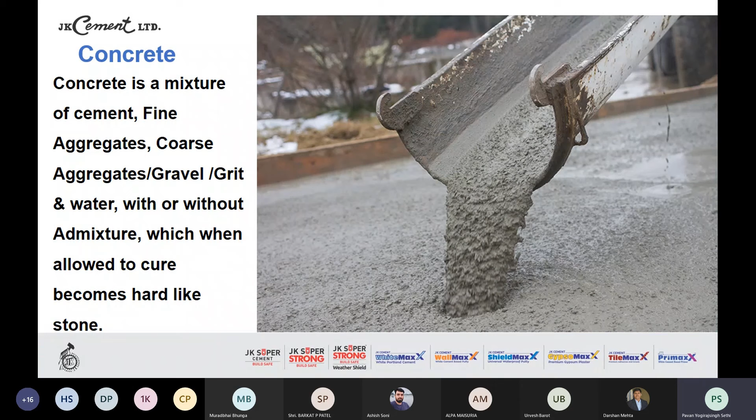A simple definition of concrete: Concrete is a mixture of cement, fine aggregates, coarse aggregates or gravel or grit, and water, with or without admixtures, which when allowed to cure becomes hard like stone. So this is the standard classic definition of any concrete.

Now the advantages of concrete, why it is being used worldwide in such a big quantum. It can be molded in any shape. It is durable. On-site fabrication is possible, like the precast. It is economical when compared to many other products. It is fire resistant up to a great extent. It is energy efficient also, because concrete does not emit as much carbon footprint as other products available, which are also costlier. And also aesthetically, since it is moldable and durable, it gives a very good aesthetic look if molded properly.

Now Surat is a city of flyovers. I have heard there are more than about 100 odd flyovers in Surat, and you might have seen many flyovers with some carvings on it. So it gives a good aesthetic look, because it can be converted into any shape or size.

Now there are a few disadvantages also of concrete. It has a very low tensile strength, and to fulfill this lacuna, we add steel to it. You might have seen whenever there is a slab, column or beam, we add reinforcement to it. This is to increase the tensile strength of the overall concrete member.

It is brittle, just like glass. It can bend a little, and up to a certain extent it will bear that, but after a little more bend, just like glass, it will crack immediately.

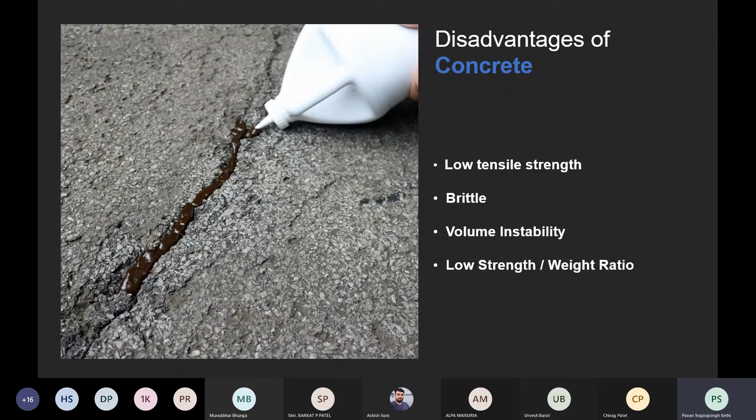It has also a very low strength to weight ratio. Just compare a member of concrete which can take some X amount of load, and then compare it with a steel member. The steel member will have a much lesser cross section area to bear the same load as the concrete. If concrete has to bear 1 ton of weight, we need a structure of 1 meter by 1 meter, but to bear the same weight, we need a very small structure of steel. It will not be a very big structure. So hence we say it has a very low strength to weight ratio in comparison to many other products. So these are the disadvantages of concrete.

Mainly there are two types of concrete in use. First is the normal concrete, like I said before, the 1-2-4 and 1-1.5-3, which is a nominal form of concrete. Nowadays we go with mix design concrete. The second form is the special concrete, high performance concrete with high strength, high flowability, and many other properties which can be seen in see-through concrete and others. We'll go through this in the presentation. So these come under the category of special concrete.

Now let's begin with the basic idea about normal concrete. Concrete that is obtained by mixing the basic ingredients like cement, fine aggregates, coarse aggregates and water will give us normal strength concrete, as you can see in the picture. The strength of this type of concrete will vary from 10 to 40 megapascal.

The normal strength concrete has an initial setting time of 30 to 90 minutes that is dependent on the cement properties and the weather conditions of the construction site.

Now, normal concrete is again divided into two parts: the plain concrete or PCC. Plain concrete will have no reinforcement in it. The main constituents are cement, aggregate and water. The density ranges between 2200 to 2500 kg per m3 and the compressive strength ranges between 10 to 50 megapascal.

These types of concrete are mainly used as lean or base concrete, or in the construction of pavements and buildings, especially in areas where there is less demand for high tensile strength, as you can see in the picture.

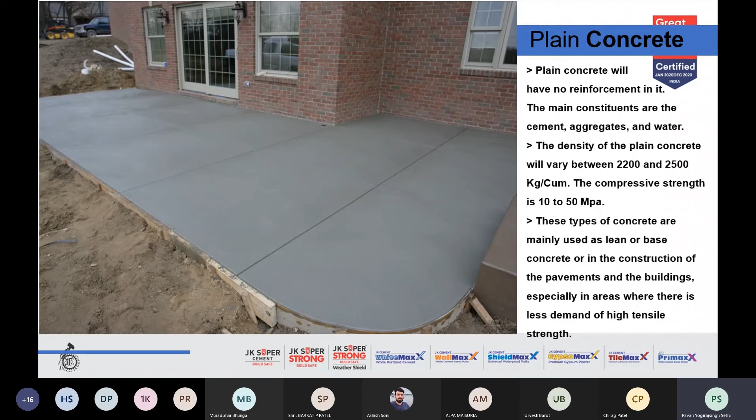Now, the second part of normal concrete is the RCC or reinforced concrete. Reinforced cement concrete is defined as concrete in which reinforcement is introduced to bear the tensile strength. Plain concrete is weak in tension and good in compression.

Hence, the placement of reinforcement will take up the responsibility of bearing the tensile stresses. The steel reinforcement used in concrete can be in the form of rods, bars, fibers, tendons or meshes.

Whatever type of reinforcement is used in concrete, it is very necessary to ensure a proper bond between the concrete and the reinforcement. This bond will control the strength and durability of the concrete. As you can see in the picture, it is a highly reinforced structure, and if the bond is not good, the overall concrete strength will be reduced drastically.

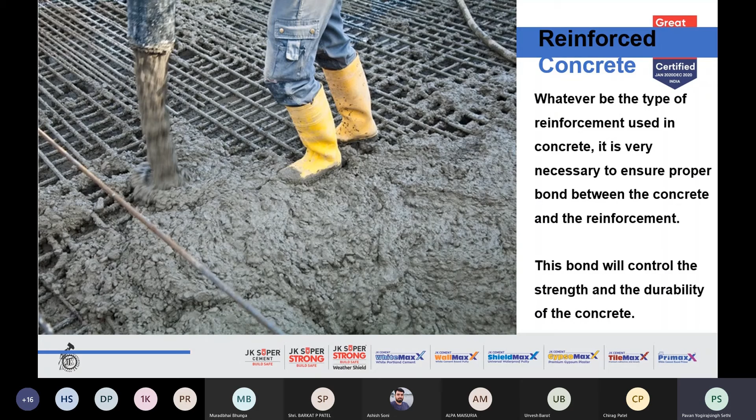Now the special concrete. We have divided special concrete into categories. First is for all major construction works. Second is the new advancement, and third, I have also taken a topic with 2 to 3 types of concrete dealing with very new advancements in civil engineering with the help of information technology.

So special concrete part one is for all major construction work. These include ready mix concrete, precast concrete, pre-stressed concrete, high density and lightweight concrete, air entrained concrete, fiber reinforced concrete, shotcrete concrete, ferrocement concrete, self-compacting concrete, mass concrete, and HPC or high performance concrete. We'll start one by one.

It is popularly called RMC, specially manufactured for delivery to the customer's construction site in a freshly mixed, plastic or unhardened state. As you can see, the concrete is still in the unhardened or plastic state. It is sold by volume, expressed in cubic meters. Any concrete sold in the RMC business is sold in cubic meters.

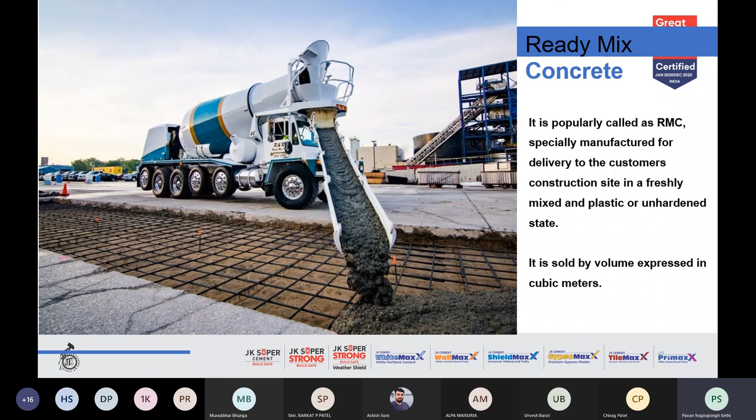Now, what are the advantages and peculiar points of ready mix concrete? The elimination of storage space for basic material at site. There is no requirement of any storage space at site. As you can see, the execution is done immediately as soon as the pouring is started.

Elimination of hiring plant and machinery at site. Wastage of basic material is avoided. Labor associated with production of concrete is eliminated. You can very well see this in the picture.

Time required is greatly reduced. Noise and dust pollution at site is reduced. I come from Bombay, and in places like Bombay, there are great issues with regard to corporation norms, where noise and dust pollution is not allowed by the corporation. I expect that Surat might have similar bylaws, so in that case too, ready mix concrete comes very handy.

Now, advantages of ready mix concrete. A centralized concrete batching plant can serve a wide area. In cities like Bombay, Ahmedabad, or Surat, one RMC plant centrally situated can cater up to 25-30 kilometer long areas.

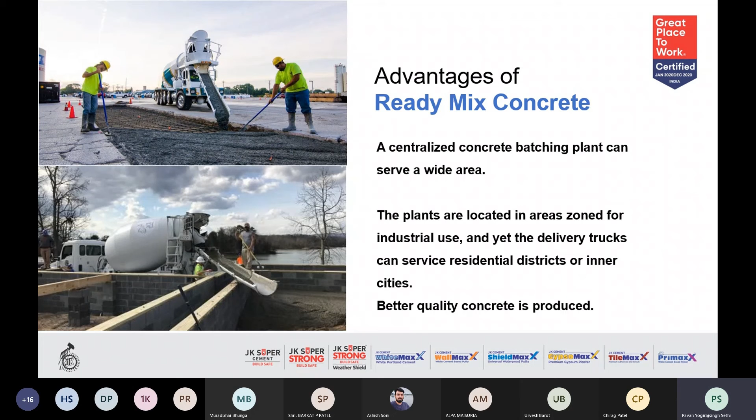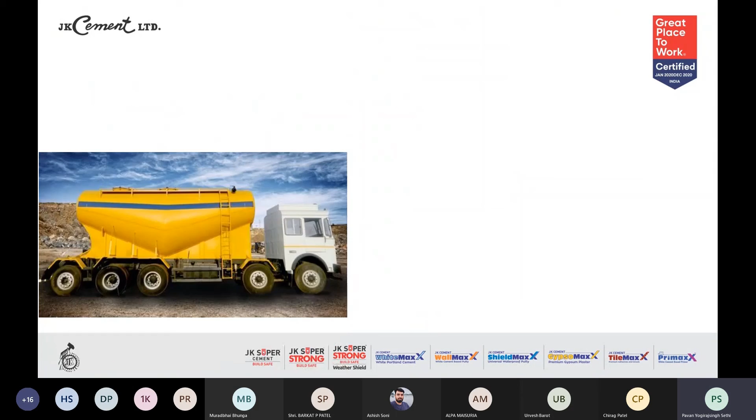These are the bulkers. The top picture in the yellow truck shows the bulkers. These are used nowadays in many big cities like Bombay, Ahmedabad, Surat. You find bags are being eliminated and bulkers are mostly in use. These bulkers have inbuilt compressors which pump the cement to the silos, so there are no bags involved. The cement is supplied in loose form.

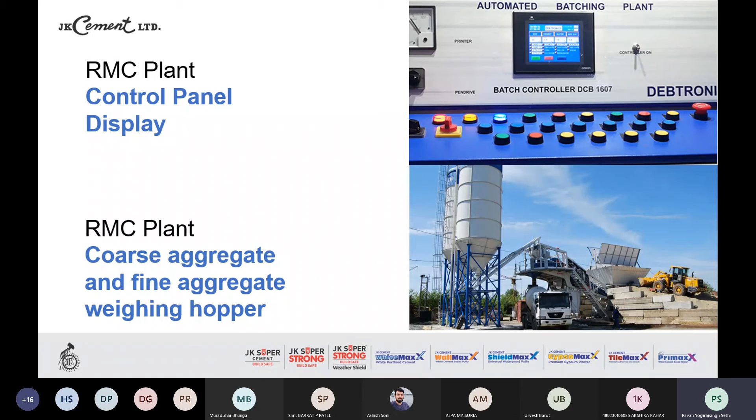Now, a closer look at the hoppers. RMC coarse aggregate weighing hopper, and conveyor belt. RMC plant transit mixer. And now this is a very important picture below. It is the transit mixer.

It is just like a truck basically with a cylinder, which consistently keeps on moving or rotating on its axis, so that the concrete inside the cylinder does not get set. Also due to the continuous agitation, it remains in flowable condition until reaching the site.

So the quality person at the RMC plant has to decide what is the distance from his plant to the site, and what is the requirement of pumpability or the slump cone, say workability, at site. For example, if a plant is located at location A and the site, location B, is at 30 kilometers, the quality person has to decide how much admixture dosage he needs to add so that he can get pumpable concrete at the site itself. This is a very key factor in the ready mix concrete business.

There is the cement weighing hopper through which it is transported to the mixer machine.

Now, in precast concrete, various structural and non-structural elements can be made and cast in the factory as per the specifications and brought to the site at the time of assembly. Such concrete units are called precast concrete units. Examples of precast concrete units are concrete blocks, precast walls and poles, concrete lintels, and many other such elements. These units have the advantage of achieving speedy construction, as only assemblage is necessary at the site.

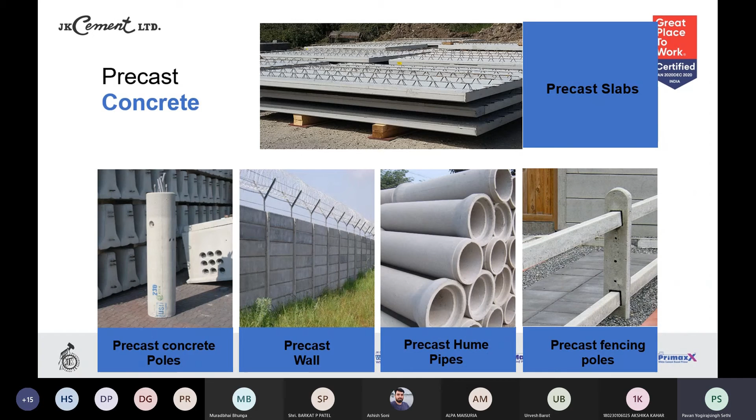Many other forms of precast units being used in India and across the world are precast slabs, precast concrete poles, precast walls, precast hume pipes, precast fencing poles, and so on. But these are the mainly used precast members in India as of now.

Now, prestressed concrete is again a form of precast concrete only, but prestressing is done in the form of tendons so as to increase or better the properties of the concrete. Most of the mega concrete projects are carried out through prestressed concrete units. This is a special technique in which the bars or tendons used in the concrete are stressed before the actual service load application.

As you can see, the tendons at the beginning of the concrete member are inserted and then released. This phenomenon of prestressing helps in lowering the section of the concrete member and makes it stronger against tension.

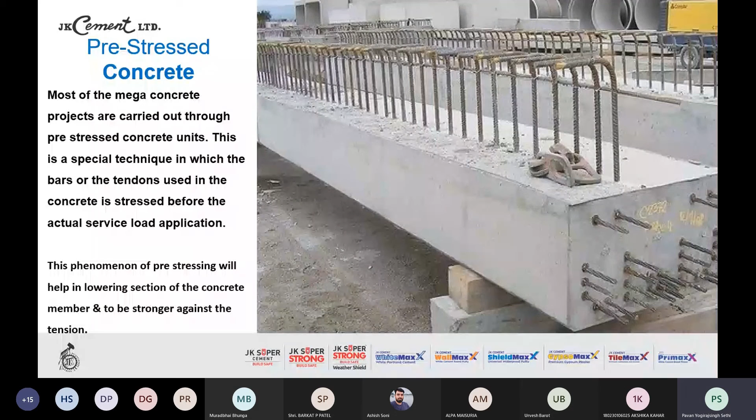Now the high density concrete. Concrete with densities ranging between 3000 to 4000 kg per meter cube can be called heavyweight concrete, resulting in high density. Normally concrete has a density ranging between 2300, or slightly above that, to 2500 or 2600.

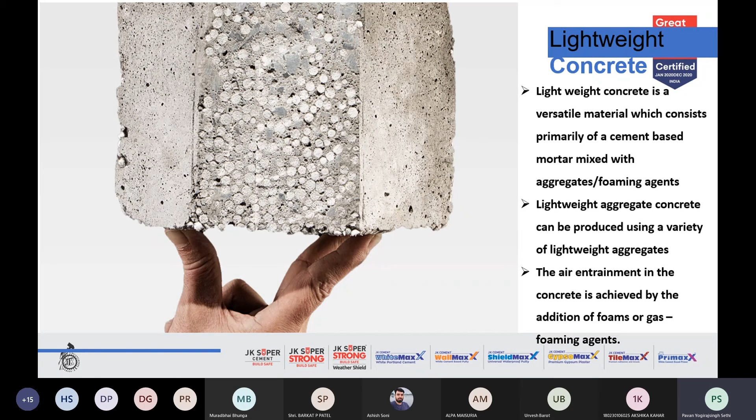Lightweight concrete is a versatile material consisting primarily of cement-based mortar mixed with aggregates or foaming agents. Lightweight aggregate concrete can be produced using a variety of lightweight aggregates, like perlite, all easily available in India. Air entrainment in the concrete is achieved by addition of foams or gas with the help of foaming agents, for example.

Lightweight aggregates originate from either natural materials like volcanic pumice, thermal treatment of natural raw materials like clay, slate or shale, for example leca, manufactured from industrial byproducts such as fly ash (Lytag), or processing of industrial byproducts such as pelletized expandable slag, that is pellite. These are the aggregates which can be used in lightweight concrete.

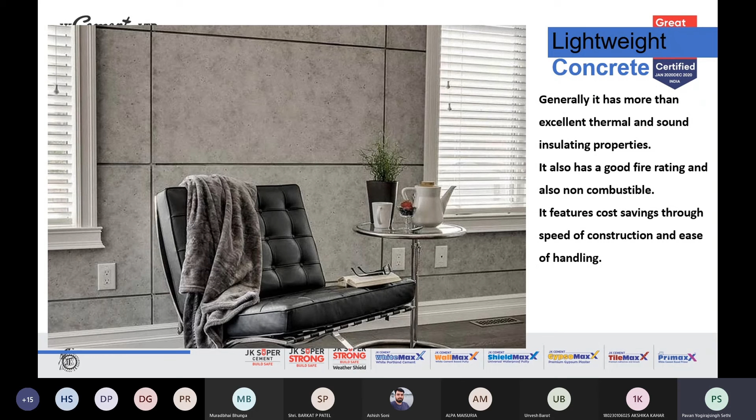Generally it has excellent thermal and sound insulating properties. It also has a good fire rating and is non-combustible. It features cost saving through speed of construction and ease of handling, and hence lightweight concrete, especially lightweight blocks replacing bricks, are being used commonly across India with great ease.

The material is now being used in an ever increasing number of applications, ranging from one-step house casting to low density void fills. These also help in thermal insulation by reducing the temperature inside the house.

Now, air entrained concrete. This is again a type of lightweight concrete, but it is a special category, which is why I've taken it separately. Let's see how air entrained concrete is made, the process.

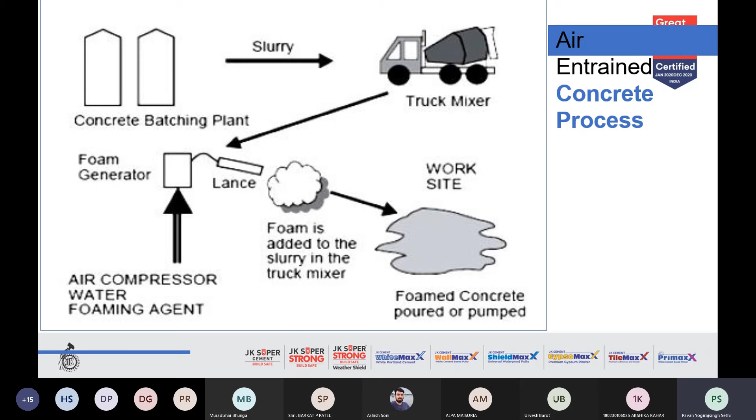Step one is the concrete. At the concrete batching plant, the slurry is poured into the truck mixer or transit mixer. Then into the truck mixer, we add foam from the foam generator through an air compressor via a lance, and the foam is added to the slurry in the truck mixer itself. At the site, the foamed concrete is poured or pumped as per requirement. This is the basic idea of how, into normal concrete, we add a foam generator and produce lightweight or air entrained concrete.

You can see in the picture, these are concrete types into which air is intentionally entrained, amounting to 3 to 7% of the concrete. This air entrainment is achieved by addition of foams or gas foaming agents. Its primary use is for freeze-thaw resistance, especially in polar areas or areas with very high temperature variations, or for improving concrete workability. Some examples of air entraining agents are resins, alcohols, and fatty acids.

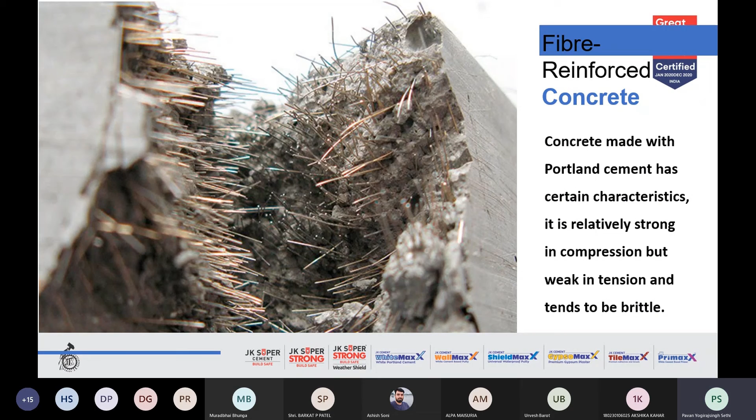Now, fiber reinforced concrete. This is again a very popular concrete, especially in the construction of many highways as of now, and fibers are being ever increasingly used. Concrete made with Portland cement has certain characteristics: it is relatively strong in compression, but weak in tension and tends to be brittle.

The weakness in tension can be overcome by the use of conventional rod reinforcement and to some extent by the inclusion of sufficient volume of certain fibers. Rod reinforcement will be at a particular location only, but the fibers will be throughout the matrix of the concrete, and here is the advantage of the fiber reinforced concrete.

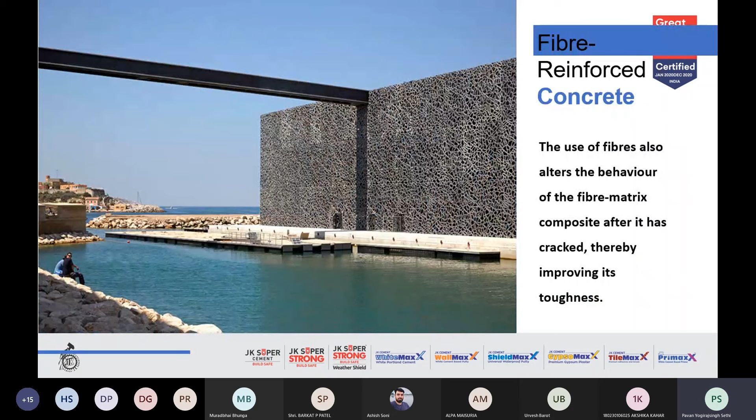The use of fiber also alters the behavior of the fiber matrix composite after it has cracked, thereby improving its toughness.

Now the fiber reinforced concrete and the uses of fibers can be listed as below. For the effective use of fibers in concrete, fibers should be significantly stiffer, number one. Number two, fiber content by volume must be adequate. There must be a good fiber matrix bond overall, and the fiber length must be sufficient. These are the three characteristics of the requirement of fibers that improve the use, that will definitely give a boost to the concrete properties.

Fibers must have a high aspect ratio, that is, they must be long relative to their diameters, as you can see in the picture.

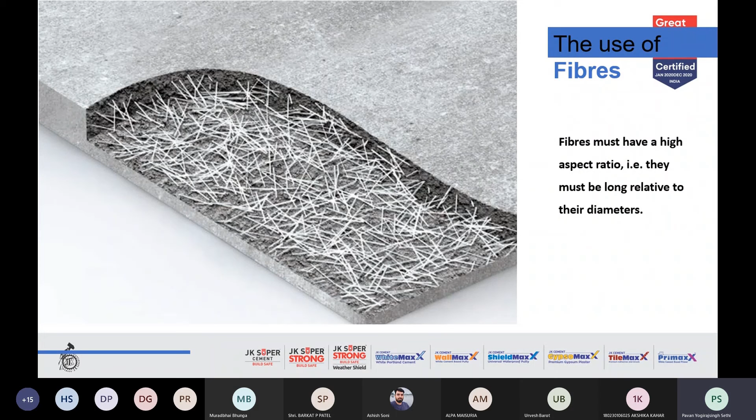Now the types of fibers, there are many number of fibers being used, but we'll cover the main ones today. Types of fibers being used are glass fibers, steel fibers, synthetic fibers, carbon fibers, nylon fibers, and polyester fibers. We'll see a few of them.

Now the glass fibers. Glass fiber have many advantages but few disadvantages. That is why they are not popularly used across the world. Glass fiber products exposed to outdoor environment have shown a loss of strength and ductility. The reason for this is not clear, but it is speculated that it is due to the alkali attack.

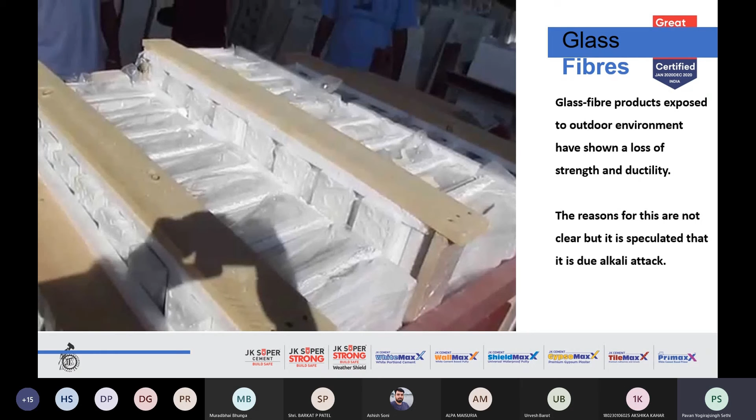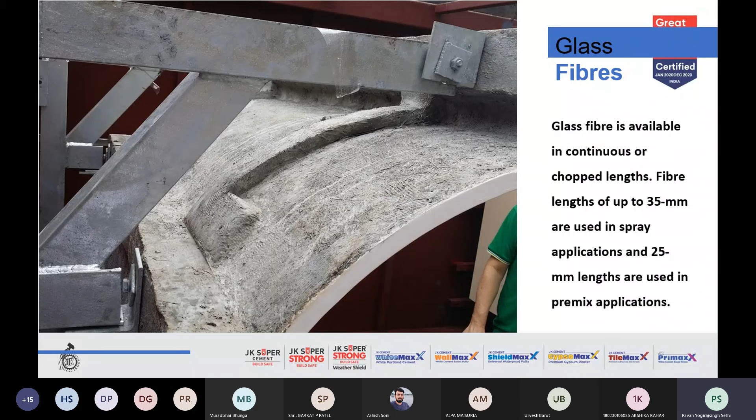Because of the lack of data on long-term durability, glass reinforced concrete has been confined for non-structural uses only as of today. Glass fiber is available in continuous or chopped lengths. Fiber lengths of up to 35 mm are used in spray applications, and 25 mm lengths are used in the premix applications.

Now the steel fibers, they are the more popular ones. Steel fibers have been used in concrete since the early 20th century. Formerly, fibers that were used were round and smooth, and the wire was cut or chopped to the required lengths. The use of straight, smooth fibers has largely disappeared, and modern fibers have either rough surface, hooked ends, or are crimped or undulated through their lengths.

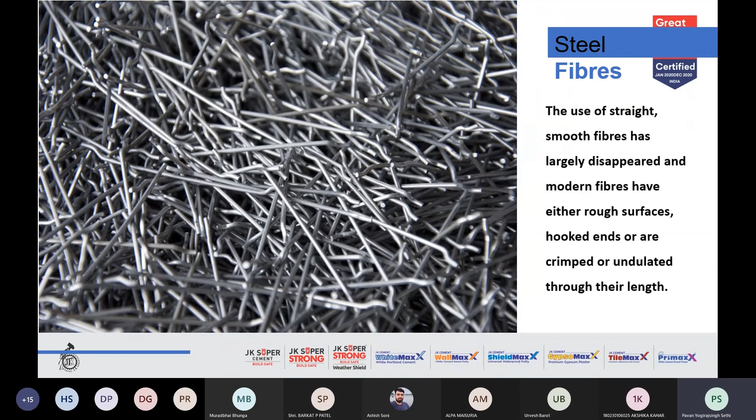As you can see in the picture, some tweaking is done at the end so that a better bond is received. The modern commercially available steel fibers are manufactured from drawn steel wire, from slit sheet steel that have a crescent shape cross section at the end. Typically, steel fibers have equivalent diameters ranging from 0.15 millimeter to 2 millimeter and a length from 7 to 75 millimeter.

Now the synthetic fibers, they are also very popularly used, especially in the construction of many flyovers in India. You might have seen the retaining walls of the flyovers, we use synthetic fibers under the blocks. Synthetic fibers are man-made fibers resulting from research and development in the petrochemical and textile industries. Use of synthetic fiber is restricted in construction work, mainly because they are not much fire resistant.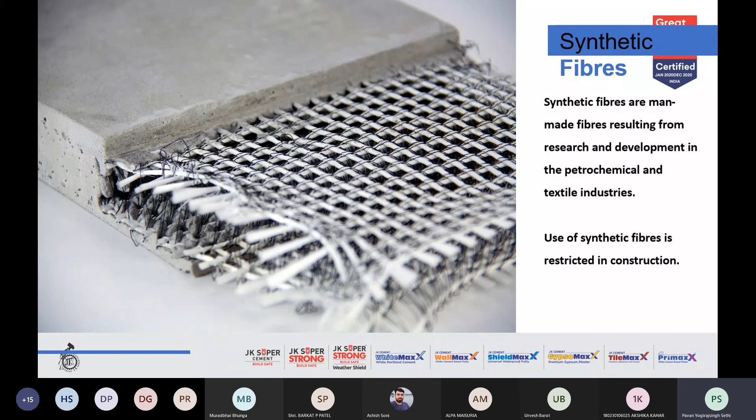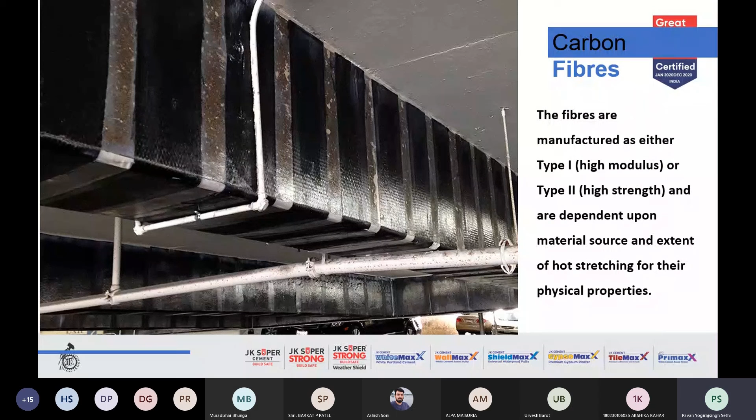Now the carbon fibers, this is again an interesting topic. Carbon fibers are manufactured by carbonizing suitable organic material in fibrous form at high temperature and then aligning the resultant graphite crystals by hot stretching. The fibers are manufactured as either type 1 high modulus or type 2 high strength, and their physical properties are dependent upon the material source and extent of hot stretching.

Next is the nylon fiber. Nylon is a generic name that identifies a family of polymers. Nylon fiber properties are based on the type of base polymer, type of additive used, and the manufacturing conditions and fiber dimensions also. Currently only a few types of nylon fibers are marketed for concrete. Nylon is heat stable, hydrophilic, relatively inert, and resistant to a wide variety of materials. Many national highways presently use these type of fibers to avoid shrinkage cracks.

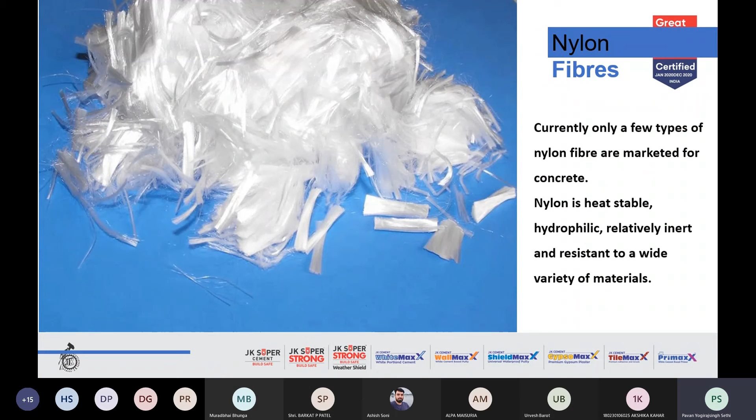Now the polyester fibers. Polyester fibers are available in monofilament form and belong to the thermoplastic polyester group. They are temperature sensitive and above normal service temperature, their properties may be altered. Polyester fibers are somewhat hydrophobic.

Polyester fibers have been used at low contents, 0.1% by volume, to control the plastic shrinkage cracking in concrete.

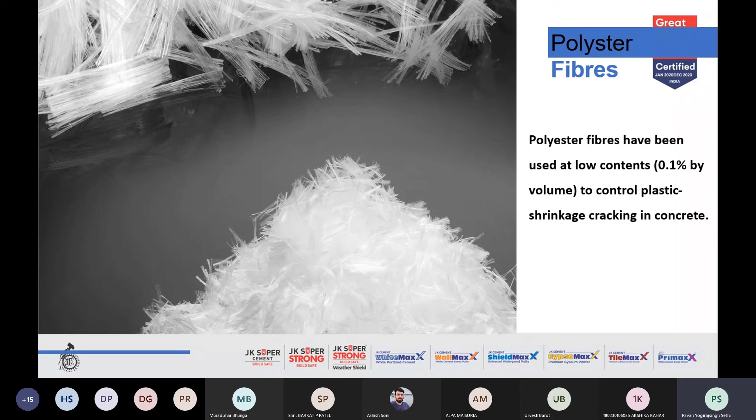We move on to shotcrete concrete. As you can see in the picture, it is self-explanatory. This type of concrete is normally pumped, or a gun is used for the pumping instead of the pouring process. Shotcrete concrete differs in the way it is applied on the area to be cast. The concrete is shot into the frame or the prepared structural formwork.

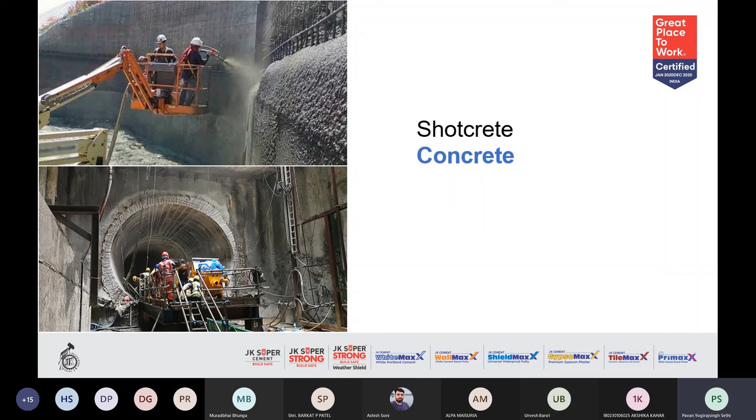Compaction processes occur at the same time. The pictures are self-explanatory. Now, shotcrete concrete, as you can see in the picture, is normally used in retaining walls and also in hilly areas as well as tunnels, where you can avoid the falling of the concrete or the stones.

Now, ferrocement or ferrocement concrete. This is the picture of a ferrocement concrete. Ferrocement is a type of thin wall reinforced concrete commonly constructed of hydraulic cement or lime mortar, reinforced with a closely spaced layer of continuous and relatively small size wire mesh. The mesh may be made of metallic or other suitable material.

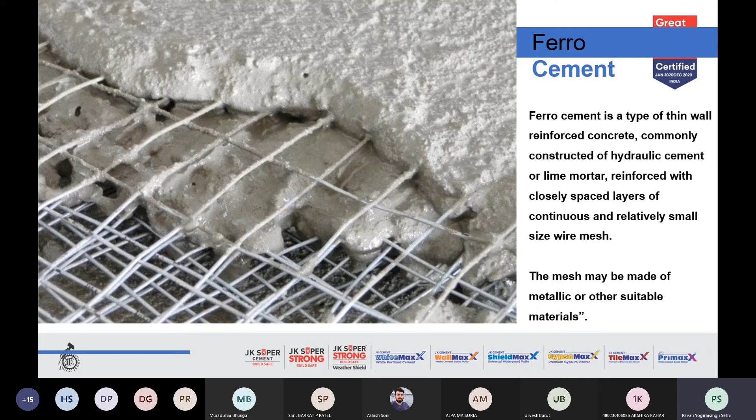The term ferrocement is most commonly applied to a mixture of Portland cement and sand applied over layers of woven or expanded steel mesh and closely spaced small diameter steel rods, rebar. It can be used to form relatively thin compound curved sheets to make hulls for boats, shell roofs, water tanks, etc. As you can see in the picture, this is an example of ferrocement concrete.

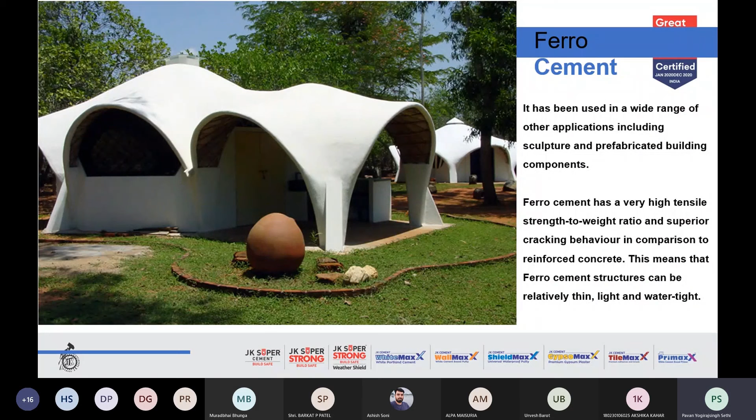It has been used in a wide range of other applications, including sculpture and prefabricated building components. Ferrocement has a very high tensile strength to weight ratio, because they are moldable as well as they have very less weight, and superior cracking behavior also because of the presence of reinforcement in it, in comparison to reinforced concrete. This means ferrocement structures can be relatively thin, light and watertight also.

Next is self-compacting concrete, or SCC. This is the most popular form of concrete that has been developed, and more research work is going on, because it is the only type of concrete where we have a very big scope of increasing the strength without doing much change in the concrete matrix.

Self-compacting concrete is an innovative concrete that does not require vibration for placing and compaction. Advantage number 1: it is able to flow under its own weight, completely filling the formwork and achieving full compaction even in the presence of congested reinforcement. Advantage number 2: it is self-compacting, does not require any, or very less, vibration. Secondly, even in congested reinforcement, especially in the columns and beams of high-rise structures, it is a very useful product.

Concrete that requires little vibration or compaction has been used in Europe since the early 1970s, but self-compacting concrete was not developed until the late 1980s in Japan. In Europe, it was probably first used in civil works for transportation networks in Sweden in the mid-90s. The European countries funded a multinational industry-led project, SCC, from 1997 to 2000, and since then, self-compacting concrete has found increasing use in all European countries.

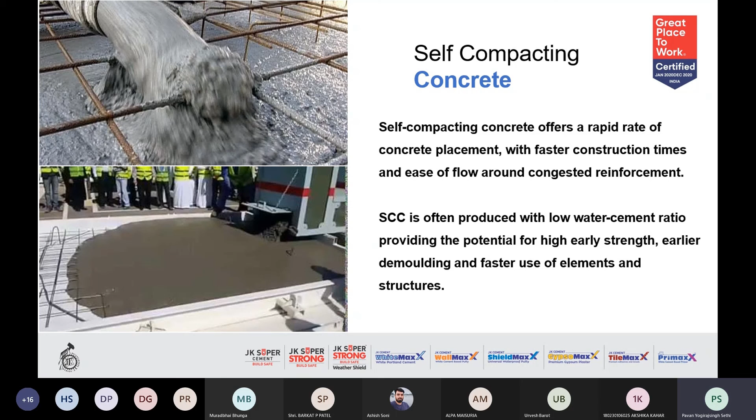The fluidity and segregation resistance of SCC ensures a high level of homogeneity, minimal concrete voids, and uniform concrete strength, providing the potential for a superior level of finish and durability to the structure. So these are the advantages: it gives uniform concrete strength, and provides potential for superior level of finish and durability. Why the durability? As you go on reducing the water in concrete, the durability and strength parameters go on increasing.

The benefits: less dependent on skill on site, safer, quieter sites because no or very little vibration is required. It has a better appearance because of the good finish, and better durability because of the use of very less water cement ratio, with strength as needed per the concrete mix design due to the minimal water to cement ratio.

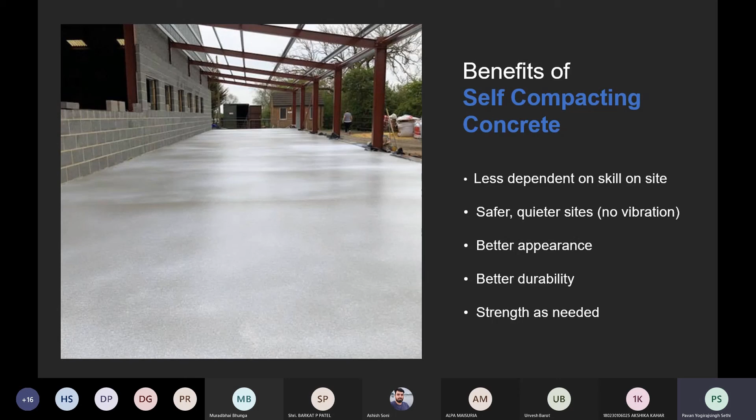Important properties: self-compacting concrete and self-compactability, where the slump value will be between 650 and 750 millimeters. These are the fresh properties initially.

Avoidance of bleeding and segregation. These occur mainly due to improper mix design, so a proper mix design with good quality admixtures will ensure less or no bleeding and segregation. Low shrinkage results from reducing water content, since water is the main culprit in shrinkage cracks. Low permeability is achieved due to high density, and strength is as needed because the mix design gives high compressive strength from the use of a very minimum water to cement ratio.

Mass concrete is used in a massive structure, for example a beam, column, pier, or dam, where its volume is of such magnitude as to require special means of dealing with the generation of heat and subsequent volume change. It generates a huge volume of heat, due to which volume changes occur, and care has to be taken by the site engineer to avoid any problems from these.

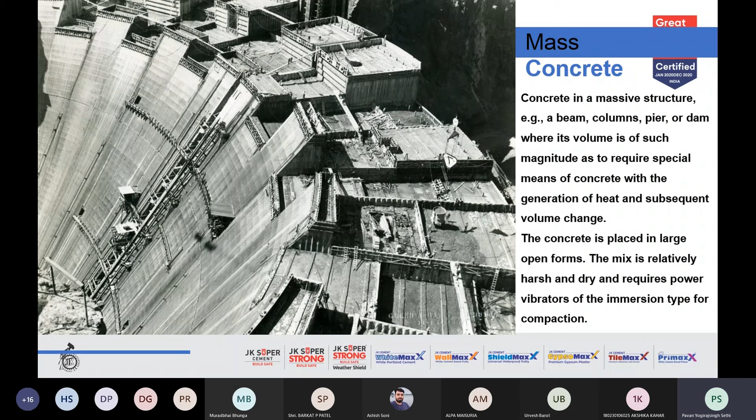The concrete is placed in large open forms. The mix is relatively harsh and dry and requires power vibrators of the immersion type for compaction. The picture is self-explanatory - you can just imagine the magnitude of concrete used in the construction of this dam.

Now the high strength concrete. This is again a big topic, and we have covered the main points. High strength concrete is concrete with strength greater than 40 megapascal. This increased strength is achieved by decreasing the water cement ratio, even lower than 0.35.

The calcium hydroxide crystals, which are a major concern product during hydration affecting strength properties, are reduced by the incorporation of silica fume. In terms of performance, high strength concrete tends to be less performing in terms of workability, which is always an issue, and this can be overcome by the use of high polymer based admixtures.

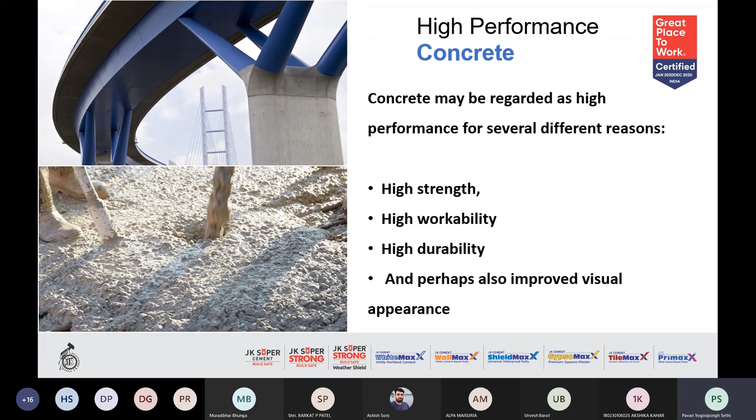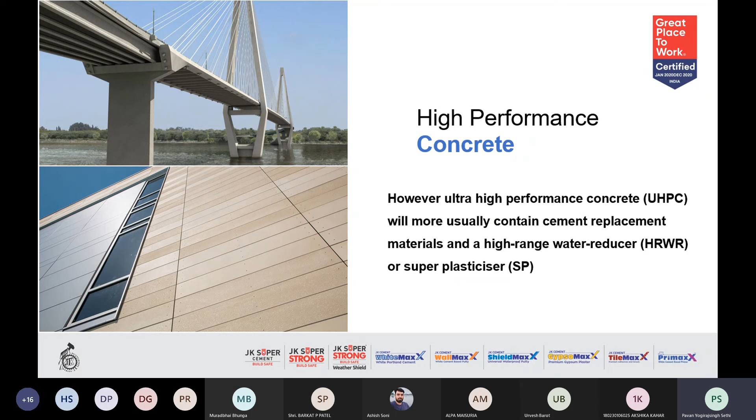High strength concrete can be considered as concrete with strength in excess of 60 megapascal, and such concrete can be produced as relatively normal concrete with higher cement content and a normal water reducing admixture. High performance concrete, however, and ultra high performance concrete will more usually contain cement replacement materials and a high range water reducer or super plasticizer. This is the basic requirement - a replacement of cement so as not to increase the heat of hydration, along with a water reducer or super plasticizer. These are the two things a concrete mix designer has to balance in making a high performance concrete mix design.

Now we begin with the second type of special concrete, dealing basically with architectural, aesthetic or non-structural purposes. First is plum concrete, second is polymer concrete, third is pervious concrete, fourth is stamped concrete, fifth is stenciled concrete, sixth is polished concrete, seventh are architectural walls, eighth is fabric formwork, and ninth is translucent concrete.

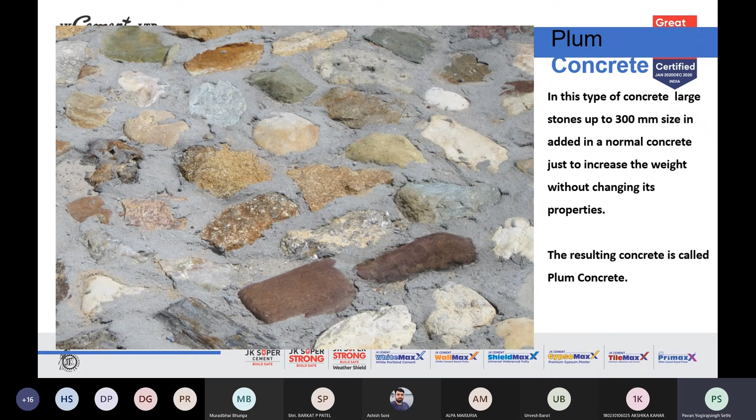We'll start with the first one, plum concrete. As you can see in the picture, this is a type of concrete in which larger stones up to 300 millimeter size are added to normal concrete just to increase the weight without changing its properties. Many smaller stones are also used, along with bigger stones up to 300 millimeters, and the resulting concrete is called plum concrete.

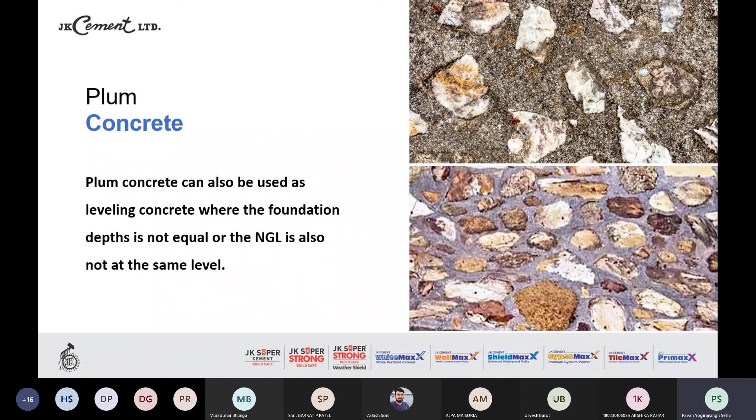The plum concrete can also be used as leveling concrete, where the foundation depth is not equal or the NGL is not at the same level. So it is also used, in many cases, as a leveling concrete.

It is made from natural minerals such as quartz, basalt and granite, which are mixed with a polymer binder. MEA polymer concrete is the basis for highly resilient heavy duty drainage channels. The high resistance of MEA polymer concrete to most chemical liquids is beneficial for the environment. These are the biggest advantages - they are chemical resistant.

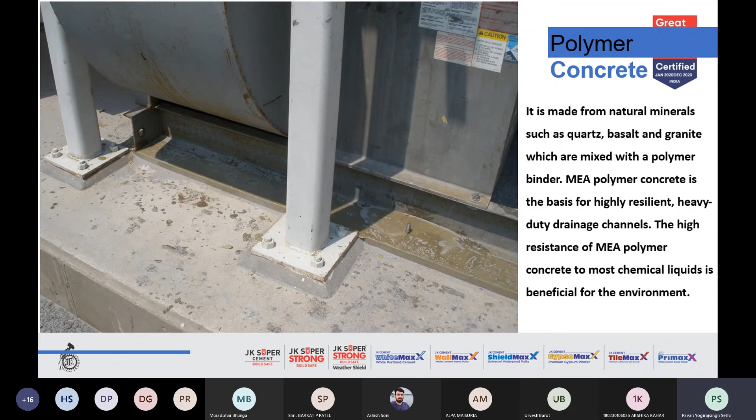Polymer concrete uses a polymer binder in place of the Portland cement. This is the basic difference between the normal concrete and a polymer modified concrete, because they use a polymer binder instead of the Portland cement.

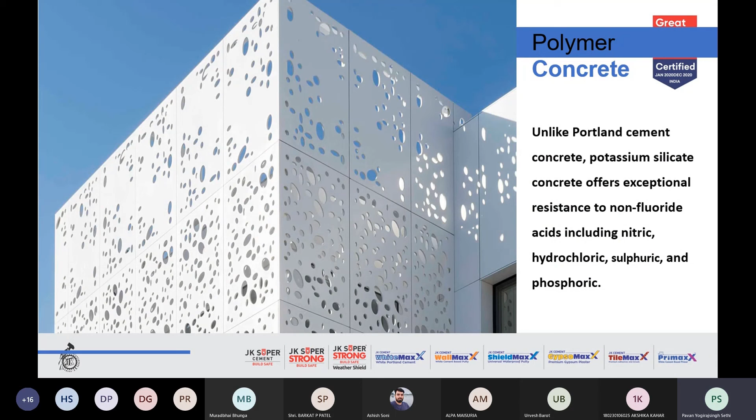The potassium silicate polymer concretes are more like the Portland cement concrete because they have very high compressive strength also. Unlike Portland cement concrete, potassium silicate concrete offers exceptional resistance to non-fluoride acids, including nitric, hydrochloric, sulfuric, and phosphoric acids. They are able to resist the acidic attack to a great extent, unlike the normal concrete.

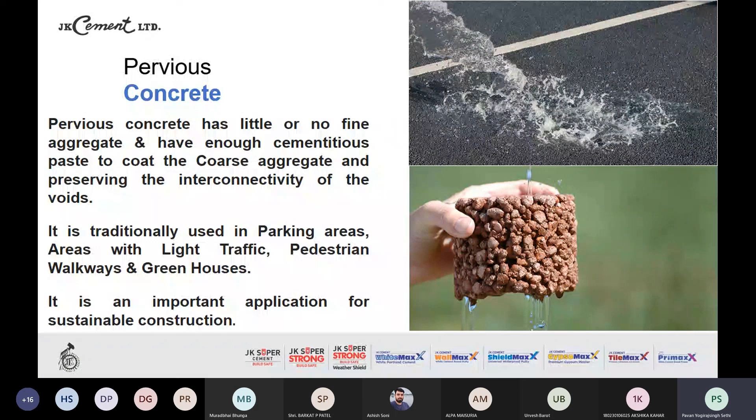Pervious concrete has little or no fine aggregates and has enough cementitious paste to coat the coarse aggregate, preserving the interconnectivity of the voids. It is traditionally used in parking areas, areas with light traffic, pedestrian walkways and greenhouses. It is an important application for sustainable construction. You can see in the picture how the pervious concrete works.

This picture again speaks for itself. No fines concrete, again a type of pervious concrete, is the no fines concrete. It can be defined as a lightweight concrete composed of cement and aggregates. Uniformly distributed voids are formed throughout its mass. No fines concrete is usually used for non-load bearing and for external walls and partitions.

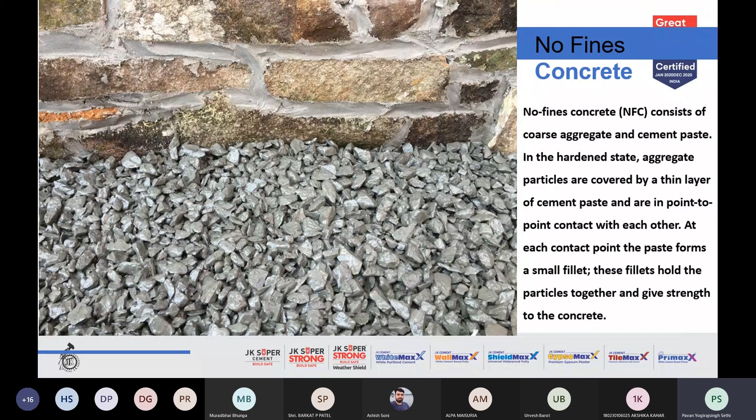No fines concrete consists of coarse aggregates and cement paste. In the hardened state, aggregate particles are covered by a thin layer of cement paste and are in point-to-point contact with each other. At each contact point, the paste forms a small fillet. These fillets hold the particles together and give strength to the concrete. You can very well see in the picture.

Next type of special concrete is the stamped concrete. They are basically architecturally used concrete. Stamped concrete is an architectural concrete where realistic patterns similar to natural stones, granites and tiles can be obtained by placing impressions of professional stamping pads. This stamping is carried out on the concrete when it is in the plastic condition.

Different coloring stains and texture work will finally give a finish that is very similar to the costlier natural stones. A high aesthetic look can be obtained from a stamped finish economically. This is used in construction of driveways, interior floors and patios. Patios are the walkways in the gardens.

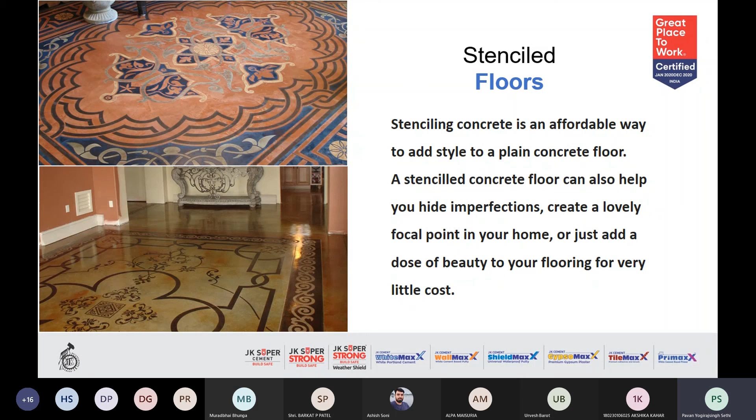Stencils can be used in new or old or existing concrete structures, just like the picture.

Next is polished concrete. Polished concrete is fast becoming the ultimate no-wax flooring material. Thanks to recent advances in polishing equipment and techniques, contractors are now grinding concrete floor surfaces, whether new or old, to a high gloss finish that never needs wax or coating. The pictures are very clear and speak for themselves as examples of polished concrete.

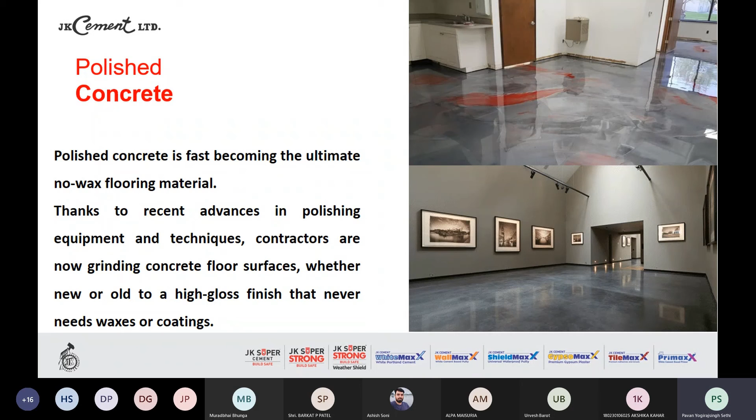Polished concrete is a form of sustainable design flooring as it utilizes a material that has already been placed. Polished concrete floors are low maintenance, as they are durable and easy to clean. Its high coefficient of friction can also make it non-slippery.

Now the architectural walls. These are beautification walls that are used with the concrete embedded in it.

Now the photo engraved concrete. The photosensitive sheet is placed into the mold face up, and concrete is poured on top.

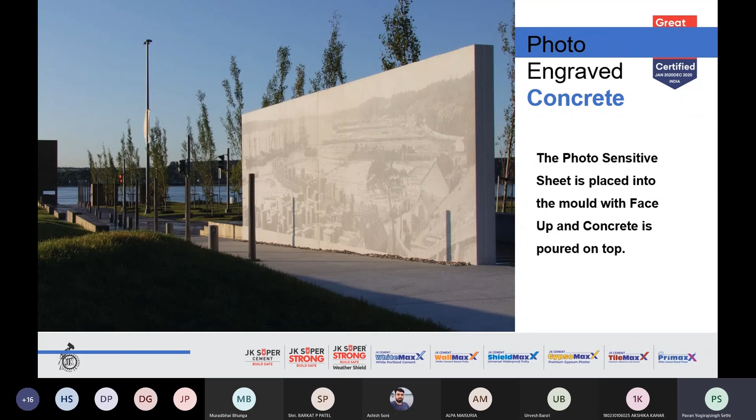Facades are designed in special ways with Reckli formliners of the photo concrete category. Photo engraving formliners transform photos onto concrete surfaces that are animated depending on the direction of the light. 3D formliners enable three-dimensional visualization. After coloring, a photo engraved concrete looks something like this.

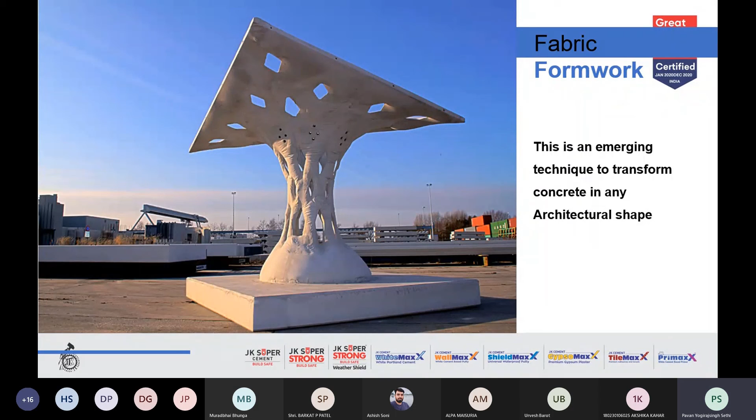Next is fabric formwork. As the name suggests, it just looks like a fabric or molded concrete. This is an emerging technique to transform concrete into any architectural shape. The sculptural and architectural freedom offered by this method of construction is matched by new possibilities for efficiently curved structures.

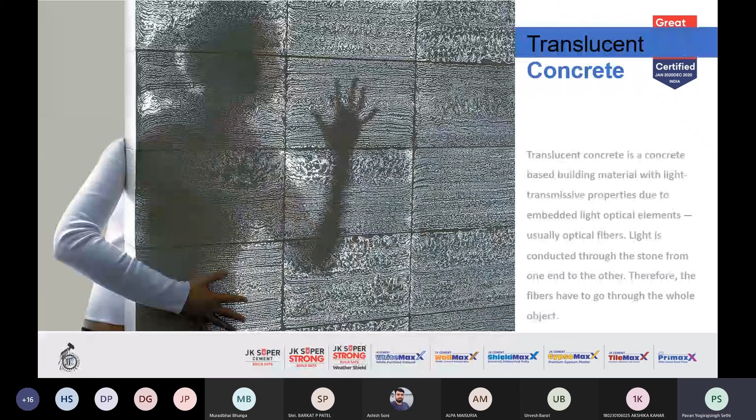Next is translucent concrete. You might have heard and seen a lot about it. Translucent concrete is a concrete-based building material with light-transmissive properties due to embedded light optical elements, usually optical fibers. Light is conducted through the stone from one end to the other, so the fibers have to go through the whole object.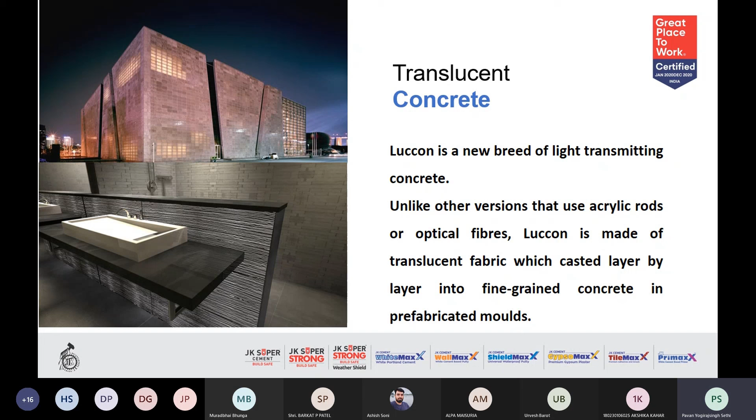Now, Luccon is a new breed of light transmitting concrete. Unlike other versions that use acrylic rods or optical fibers, Luccon is made of translucent fabric which is cast layer by layer into fine grained concrete in prefabricated molds, and the resultant you can see in the picture. This is the form of Luccon concrete, and these are the types of translucent or see-through concrete.

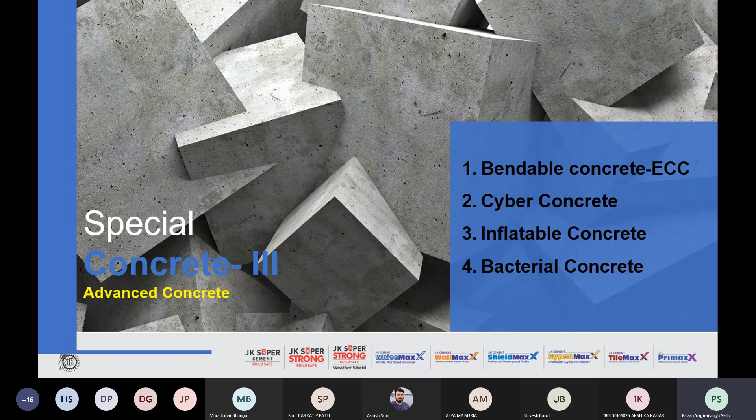We start with the third type of special concrete: advanced concrete, covering four topics. First is bendable concrete, or engineered cementitious composite. Second is cyber concrete, using information technology to know the condition or properties of the concrete inside, by going inside the concrete. Third is inflatable concrete, also called use-and-throw concrete. And fourth is bacterial concrete for repair works.

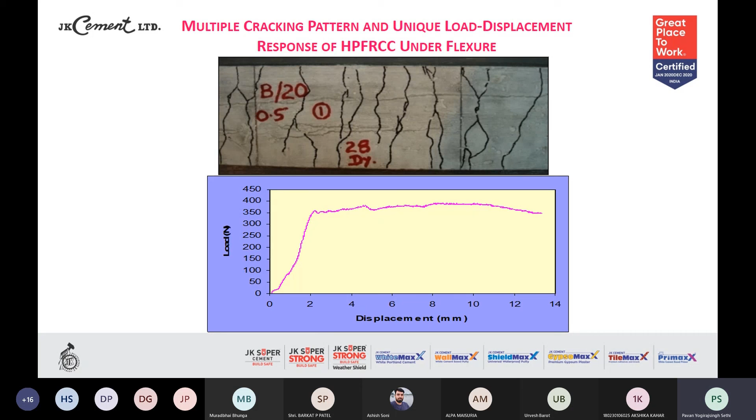The bendability is to be increased by use of fibers. Now, multiple cracking pattern and unique load displacement response of high performance fiber reinforced cement concrete under flexure. You can see the picture showing the cracks, and below you can see the graph depicting displacement versus load.

Now, the various types of high performance fiber reinforced cement concretes: first we saw Sifcon, second was Simcon, third was ductile concrete, and now we move to engineered cementitious composite, or ECC. These are the optimized form of high performance fiber reinforced concrete. The upper three, Sifcon, Simcon and ductile, consume a lot of fibers, due to which they are less processable at site and very costly too. That is why we go for the new type of concrete, the ECC, the engineered cementitious composite.

Engineered cementitious composite is a systematically engineered form of concrete using micromechanics, with unique features. First, ultra high ductility. Second, strain hardening behavior. Third, tight crack width control. These are the three advantages that can be achieved using ECC. Further studies are going on across India, and I hope budding engineers like you also do some research work in this field, so that we are able to produce a very good bendable concrete in India also.

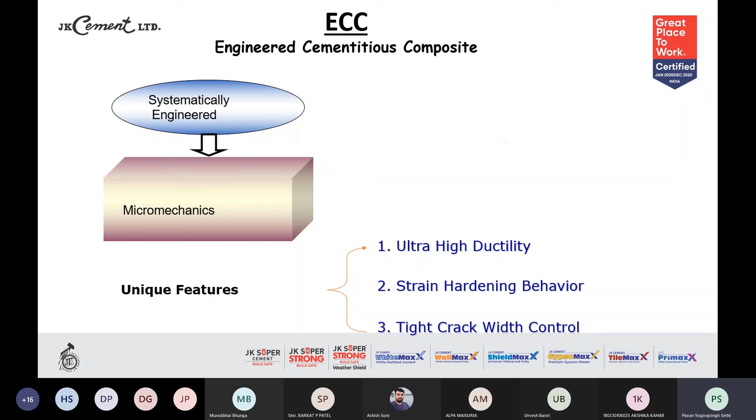Next is the cyber concrete. Now, use of information technology to know the durability conditions by going inside the concrete without actually going inside is the form of cyber concrete.

When YRP's special reader is moved close to the surface of the smart concrete, it converts the stored data to words, which reveal things such as when and where the concrete was made, its strength, its quality, and the proper applications also. So this is again in an advanced stage now.

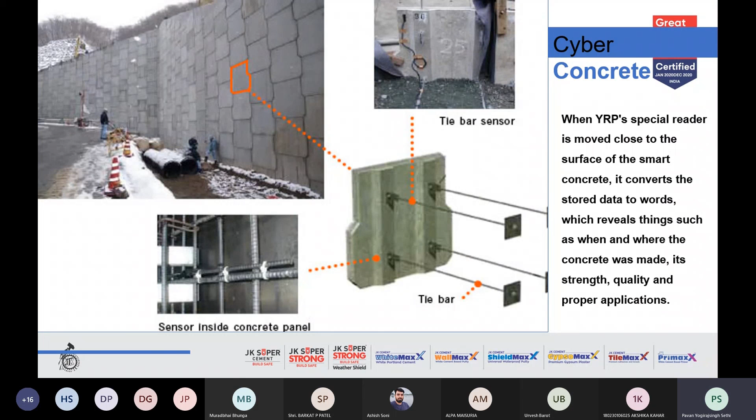I expect more and more work to be done in this IT field, so that without going to destructive testing like core testing and all, we can very well get to know about the concrete's durability, how durable the concrete is even after 25 or 30 years of placing. This can only be achieved by the use of cyber concrete or smart concrete.

It has been used in a European country. When inflated, it covers an area of about 172 square meters. The cost in Indian rupees will be about 1.1 to 1.2 lakh rupees.

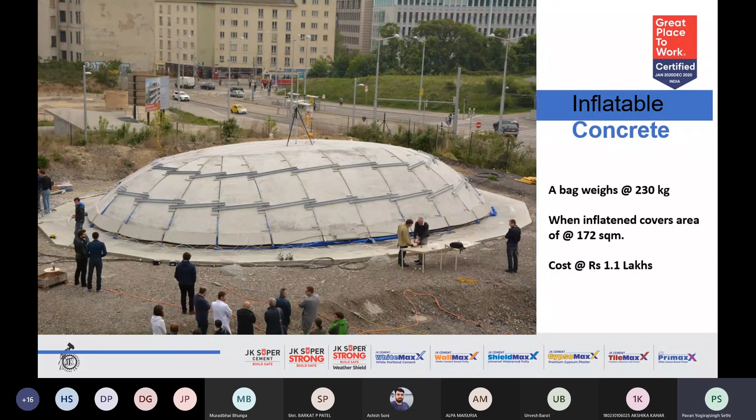So this is a single use, inflatable concrete, or use and throw concrete, which can be very well used in small exhibitions or public meetings and all, which can be used and thrown immediately without much cost. This is again a smaller picture that was available on the net.

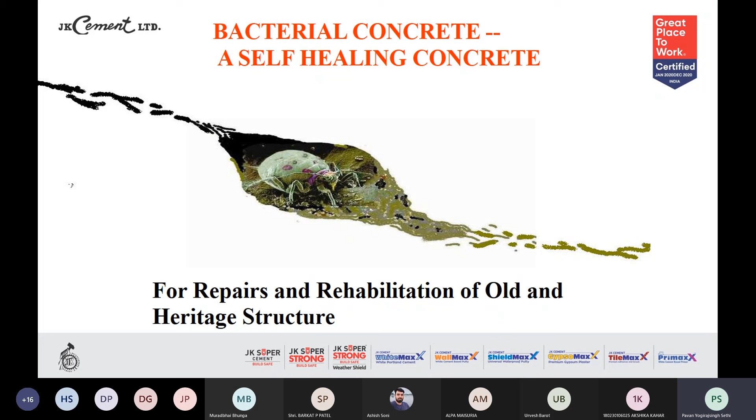Last in the segment is the bacterial concrete. It is a form of repairable concrete. Now, bacterial concrete is a self-healing concrete for repairs and rehabilitation of old and heritage structures.

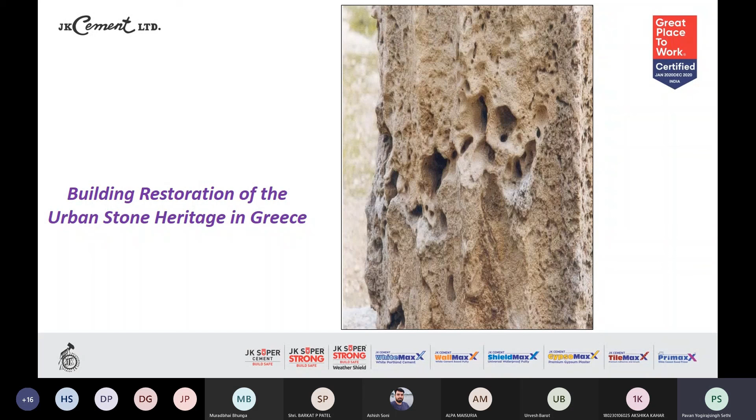Now, with that, the topic on special concrete is over. Now I'll just brief a bit about JK Cement and its products. JK Cement was earlier known as JK White Cement. Now we have rebranded ourselves since last year as JK White Max.

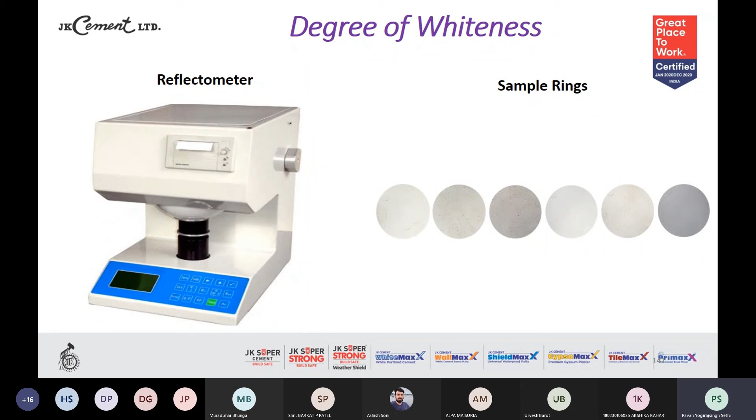JK Wallmax and JK Shieldmax are the two wall putties that JK White Cement produces. These are very popular products, and we are proud to say that JK Wallmax is the #1 selling wall putty not only in India but across the world. JK Shieldmax is the universal waterproof putty.

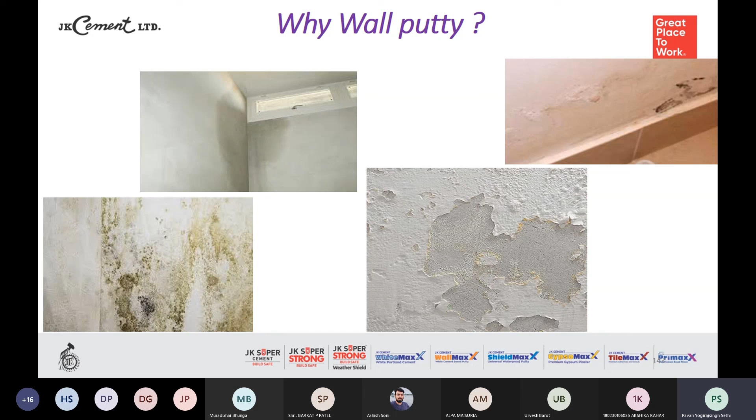JK wall putty application gives a beautiful finish to the walls and increases the life of the paint also. We have JK Primax also.

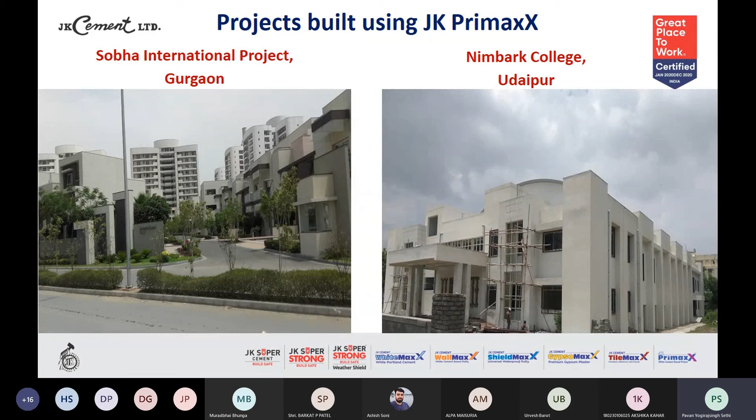The second product that we have is the white cement based primer, which is used as a base coat before the paint work, which can be used on the plastered surface inside the building and outside the building. As you can see, many sites across the country - Sobha International Project Gurgaon, Nimbark College Udaipur, Sanjeevani Group Jodhpur - have used JK Cement Primax before the application of paint on the plaster. The Ummed Public School Jodhpur has also used this Primax before the paint work.

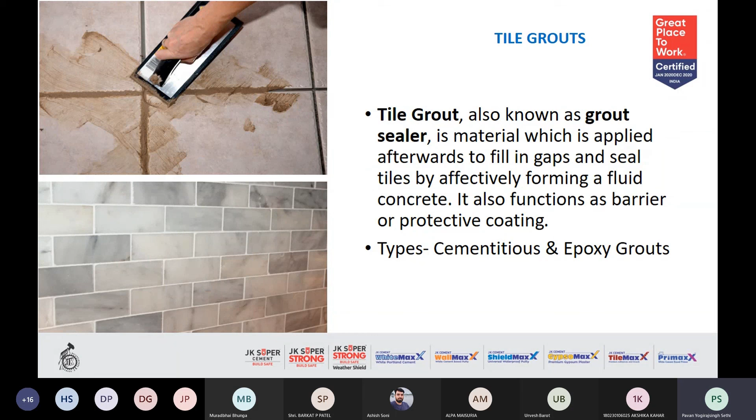Now the construction facts. In the end I'll brief a few construction facts. The Portland cement was invented by an Englishman named Mr. Joseph Aspdin, who patented it on 21st October 1824. He was a mason by profession. So the person who discovered cement was not an engineer, not a scientist, not a doctor - he was a mason by profession.

The Three Gorges Dam in China is the largest concrete structure in the world, standing at 607 feet high and 7575 feet long. The largest concrete structure in the world as of today is the Three Gorges Dam. And JK Cement Limited is a world leader in white cement, and JK Wallmax is the #1 wall putty used across the world.

Now concrete in the modern world is reaching the sky and making a big difference today.